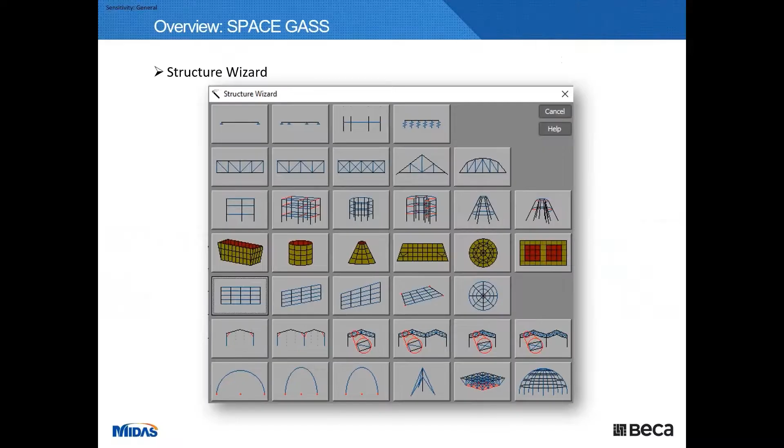There are some more useful things available in SPACE GASS, like we can perform linear static analysis, non-linear static analysis, buckling analysis, dynamic frequency analysis, spectral response analysis, and so on.

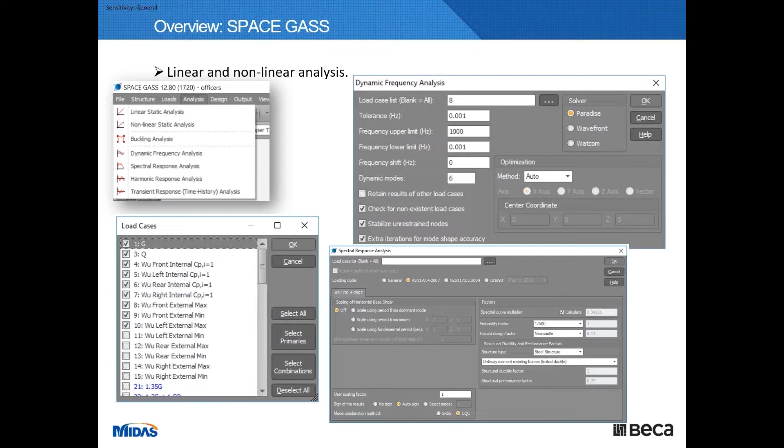Dynamic frequency load - we have load cases readily available for certain kinds of structures, as I discussed previously, since we have the wizard available in SPACE GASS.

We can perform wavefront analysis, which is buckling analysis for steel structures as well as other kinds of structures. It's another helpful feature you can check by using it.

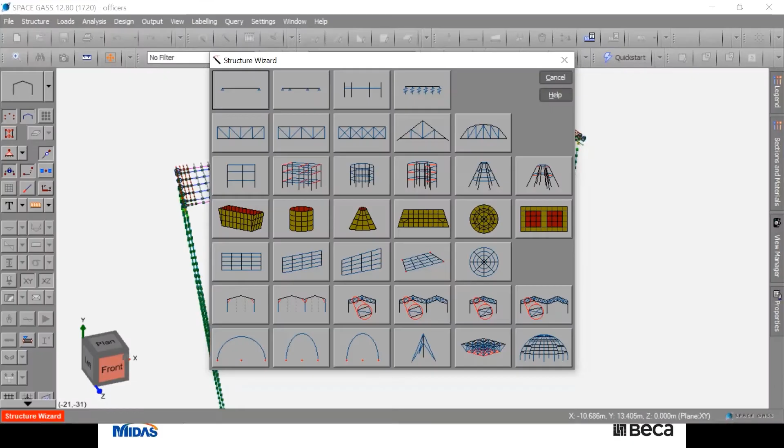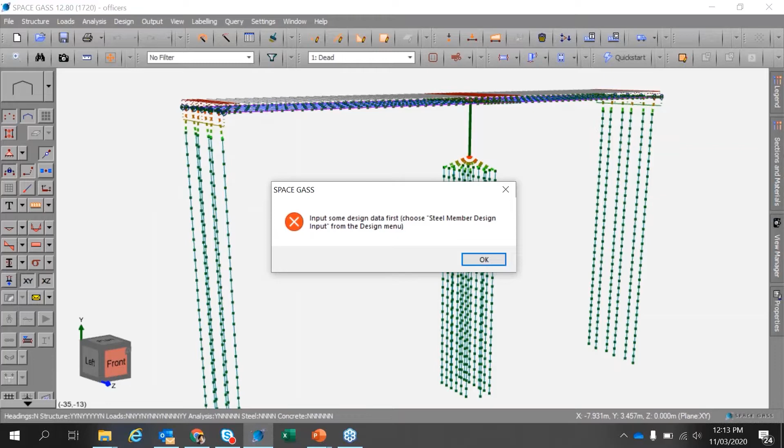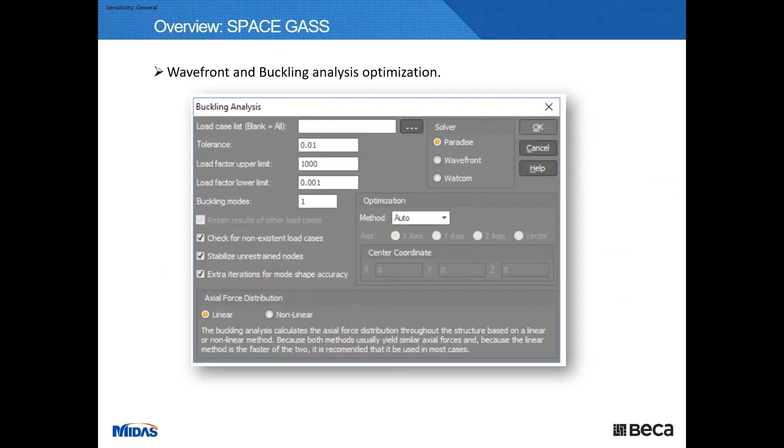We can manage filters by selection in SPACE GASS, which is a quite good supportive feature available in SPACE GASS.

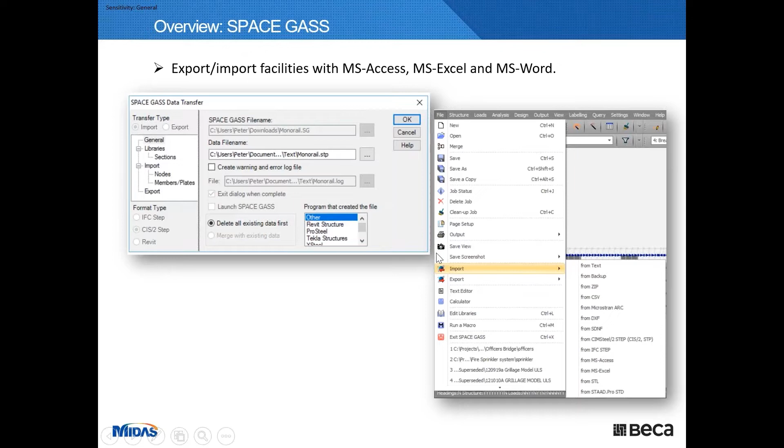We can also import and export Excel files, and other structures - you can easily import your CAD file as a structure, like a line beam model, from AutoCAD to SPACE GASS. You can even merge two structures by utilizing the merge facility of SPACE GASS, which is another good feature, and you can also run macros in SPACE GASS.

There are some extended features that are not included in the standard SPACE GASS software. You have to purchase them separately if you are performing plate element analysis, cable element analysis, or dynamic frequency analysis. These modules are not included in the standard form of the software, which is sometimes helpful if you are not interested in doing these analyses, so you don't spend more money on that. But sometimes you suddenly need to perform this kind of analysis, so you have to have it in your software. In MIDAS, we have each and everything available.

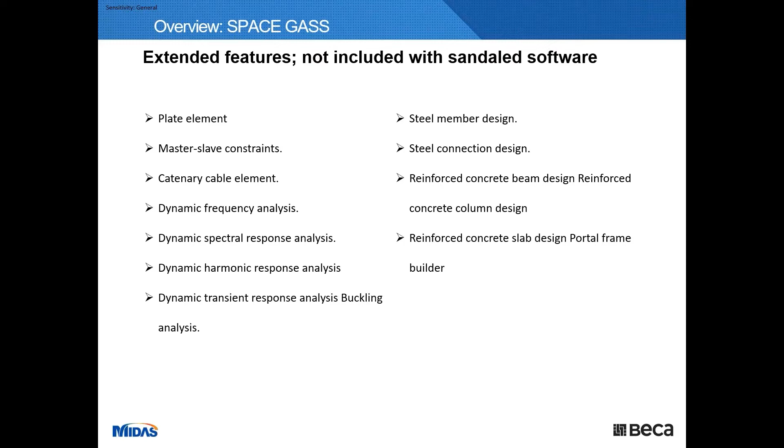If you talk about the limitations of SPACE GASS, yes, there are some. SPACE GASS is a multi-purpose structural analysis and design software for 2D and 3D structures, but there are some features that we cannot perform as quickly in SPACE GASS as we can in MIDAS. There is a list of these features that I have found while working in SPACE GASS.

When working in SPACE GASS, when you need to select or create a filter, like a number of elements, sometimes it gives us some errors. We will discuss all of these in a few coming slides. This is just a go-through slide. This is my first part, filter selection, so I'm starting from here onward.

If you are working in SPACE GASS, sometimes we receive this kind of error: too many selected members to fit in the filter list. I have created a video for that as well, which I can play for you. We have some errors when working in SPACE GASS, receiving errors during selection.

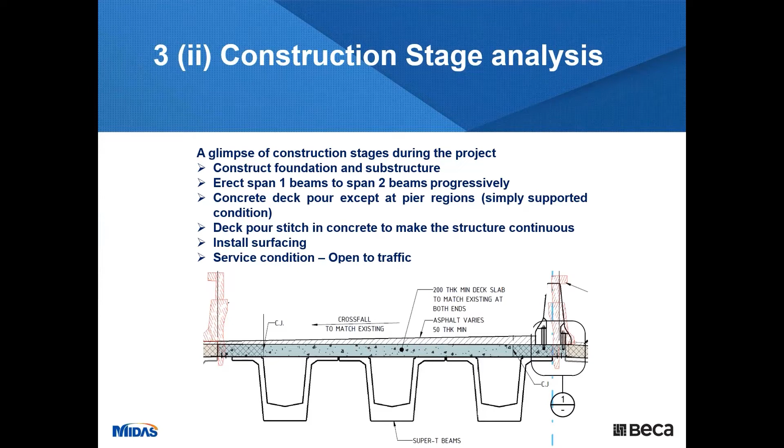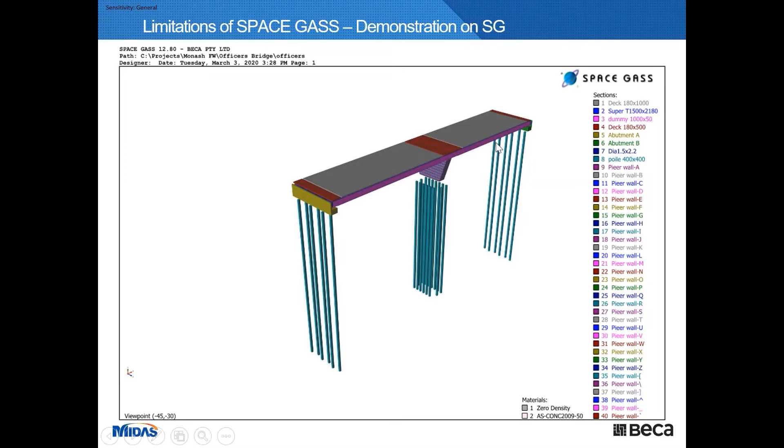When I was working in SPACE GASS, there were limitations to performing such operations, so I moved to MIDAS and performed all the analysis in one go. This is the bridge I'm talking about, a two-span continuous bridge. I tried to work on it in SPACE GASS as well, but I was unable to perform every task there. We cannot easily perform this stage analysis in SPACE GASS.

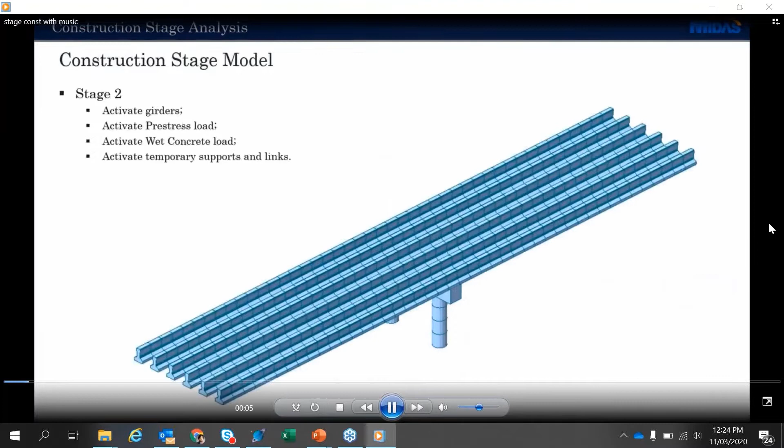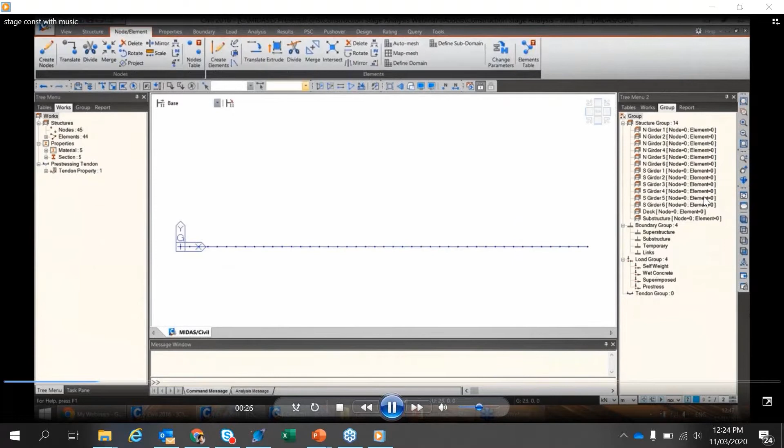I think you guys can see this video now. There is some... Can you guys see? Give me just a reply on this. Thank you very much.

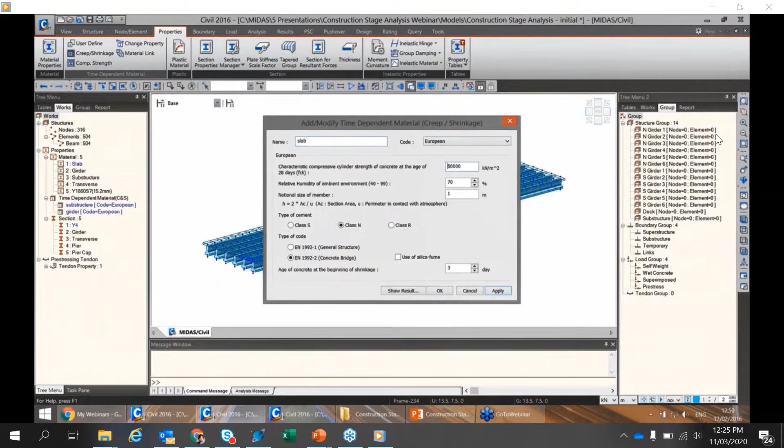This is the stage analysis while working on MIDAS. This feature is extended to MIDAS, so we can easily perform stage analysis while working on continuous bridges or when you have more than one stage involved in your construction.

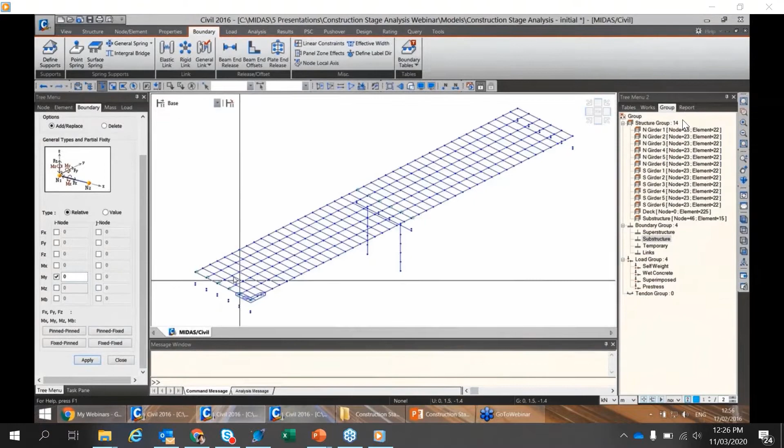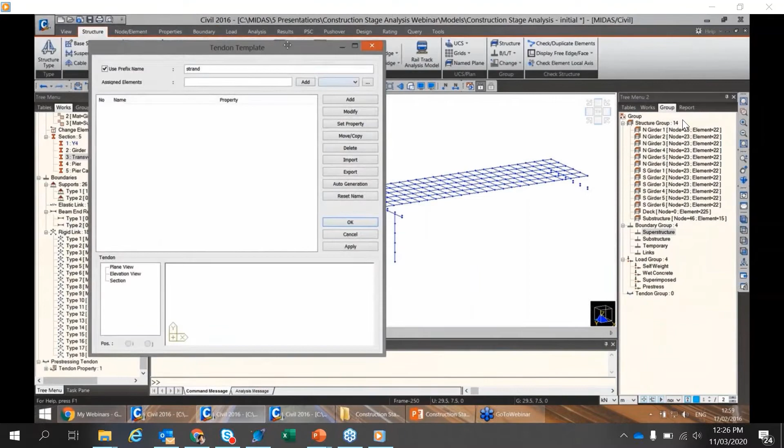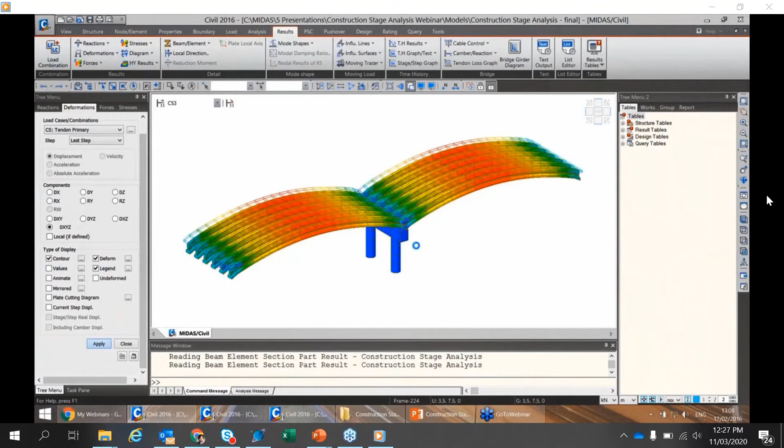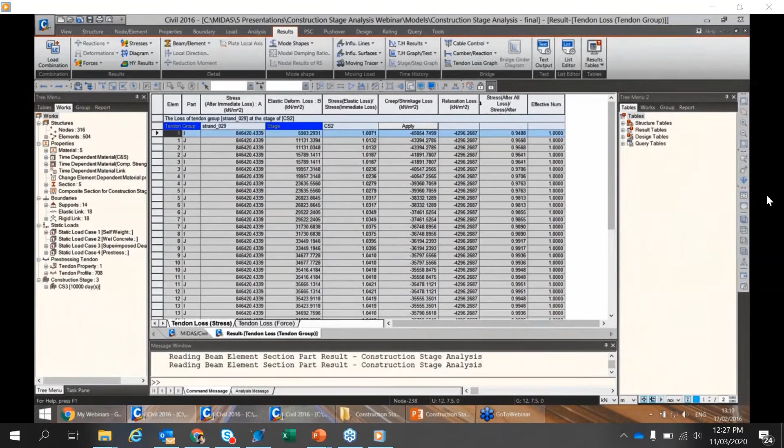Yeah, we have results as well. We are not interested in this staging right now, so we can move on from this modeling to our presentation.

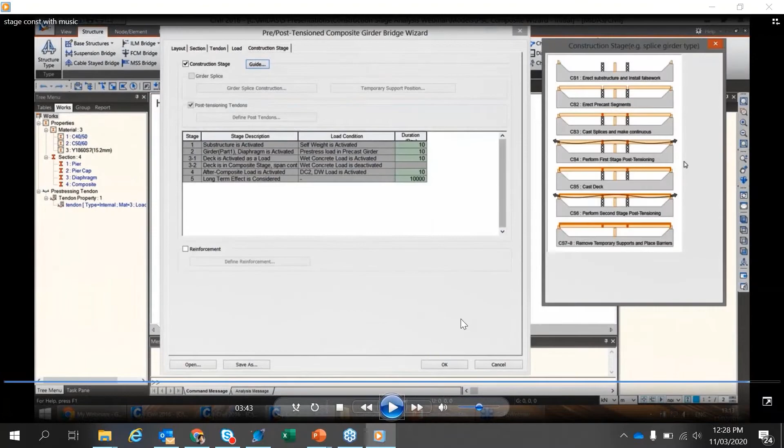Yeah, can you? I think you guys can see my presentation now.

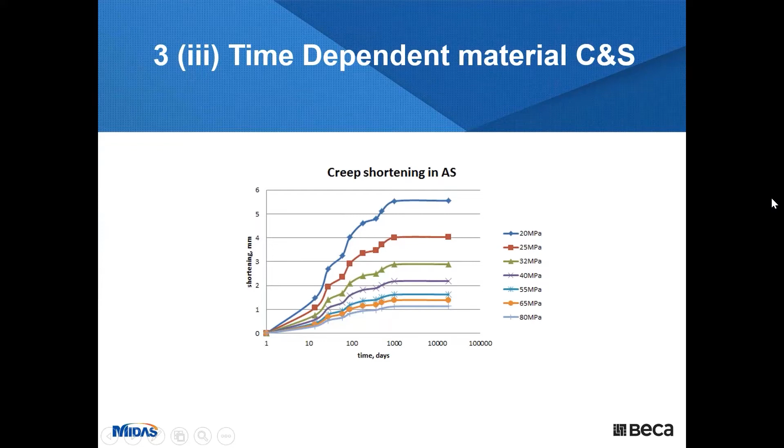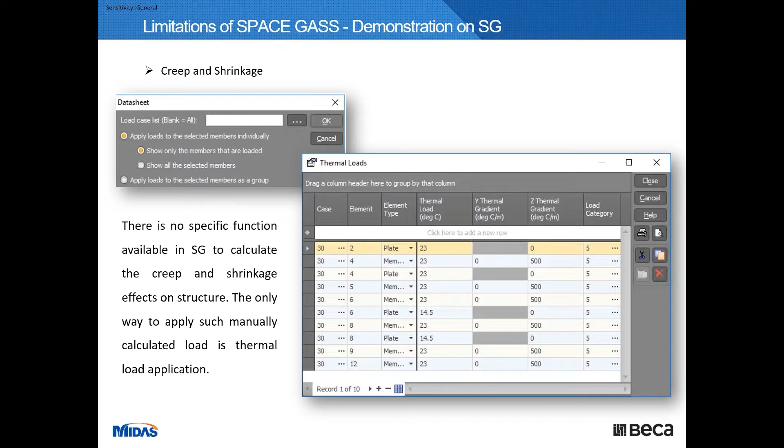Now we will discuss time-dependent material, creep and shrinkage. When working in SPACE GASS, we cannot apply creep and shrinkage as a material property. However, we can apply it as a thermal load for creep and shrinkage. But in the case of MIDAS, we can apply it as a material property. We can perform creep and shrinkage as good as possible in MIDAS because we can give our moisture contents and concreting time, and we can perform good creep and shrinkage analysis in MIDAS compared to SPACE GASS.

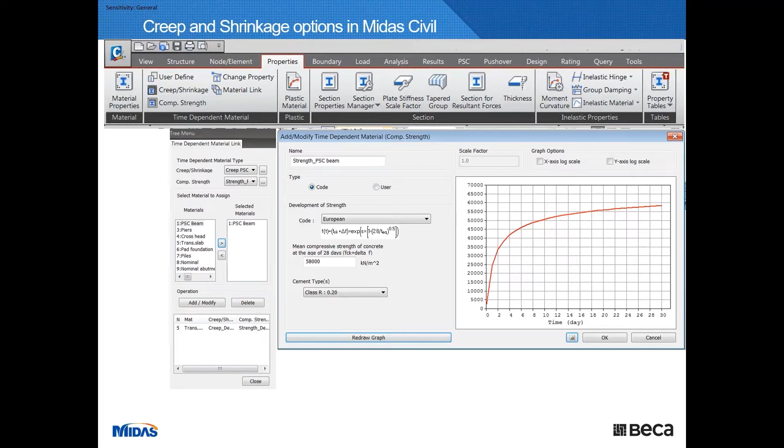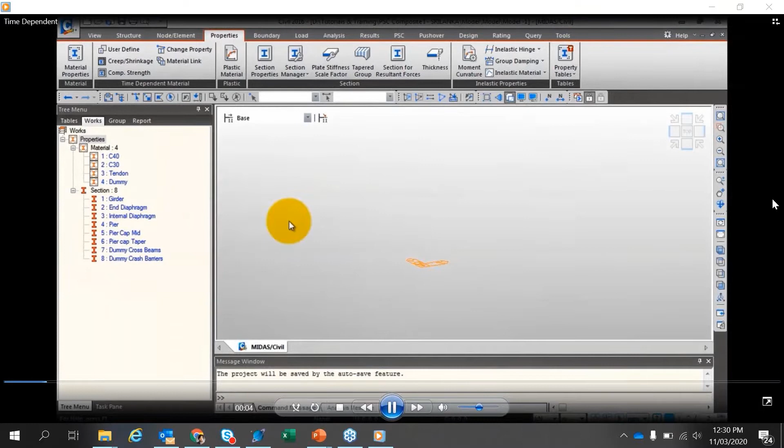I have another video for time-dependent properties. I think I can play it from here. Hope you guys can see this video. I hope you can see my video now. Thank you. Thank you very much.

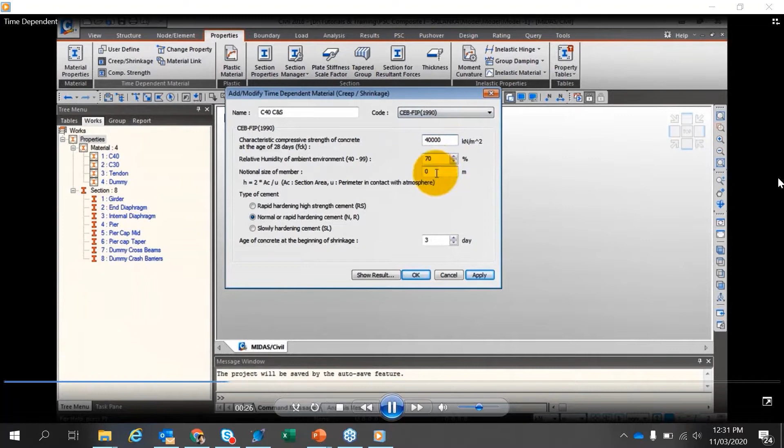These features are not available in SPACE GASS. We can easily perform creep and shrinkage analysis using MIDAS.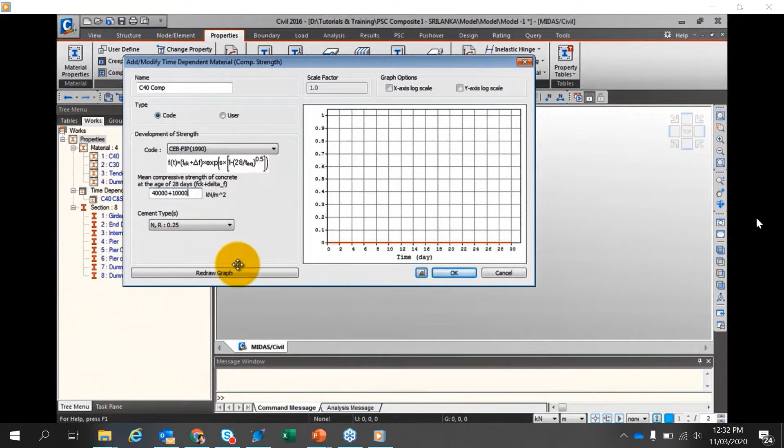It automatically creates the curve, the strength curve, for you.

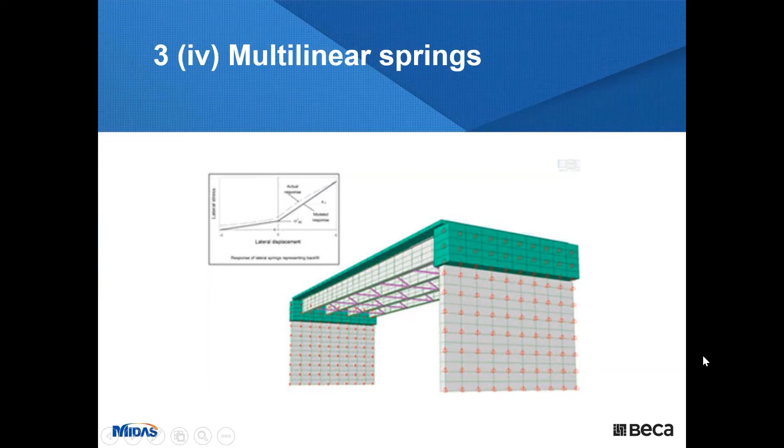So there is another constraint working in SpaceGass: a multi-linear spring. When you're working in SpaceGass, there is only one function available. We cannot perform P-Y; we cannot put values of a P-Y curve in SpaceGass. We have to give the stiffness values for the springs. There is no option available for having any other input from the user.

So this is the major constraint when we have a number of piles and we need to give input after each and every depth, like maybe every 500 millimeters. In that case, we need to spend a lot of time during modeling as compared to MIDAS, where we can easily perform the multilinear spring function.

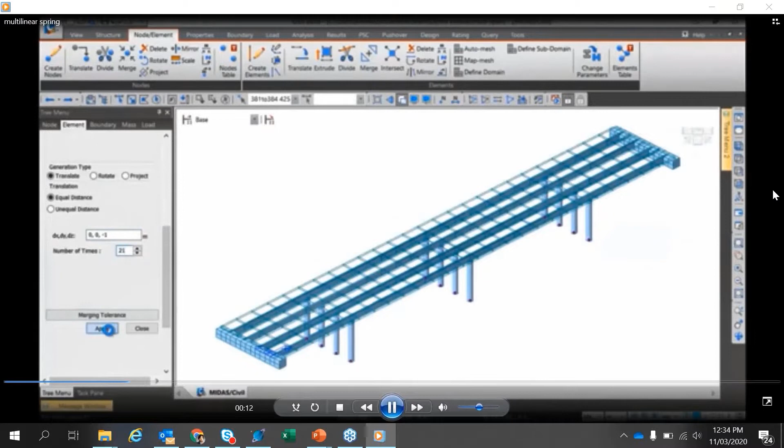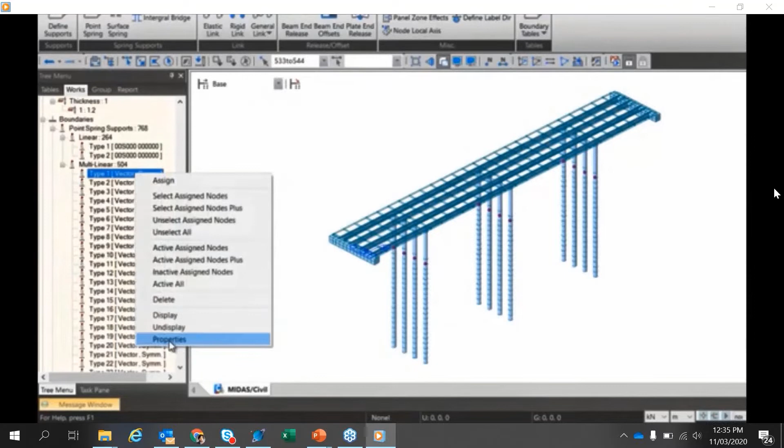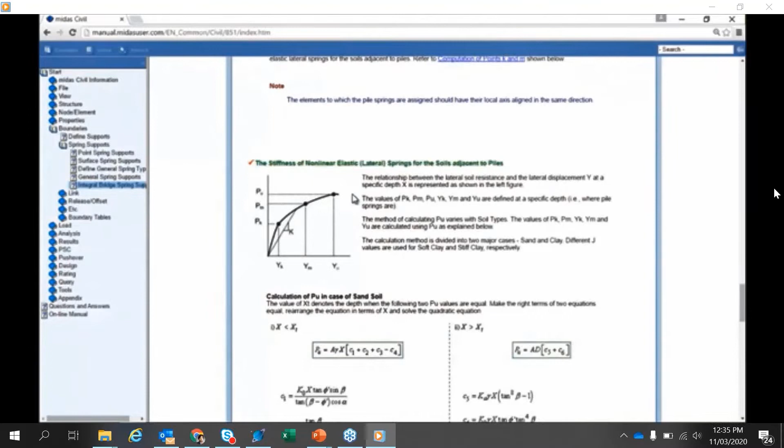By using MIDAS, we can easily perform this multilinear spring function, as you can see from this video. We are giving the P-Y values, and this we cannot perform in SpaceGass. We have to give only the stiffness of the spring. If we have a 30-meter deep pile, we have to give input maybe 60 times on each abutment, so we can multiply this time by the number of supports we have.

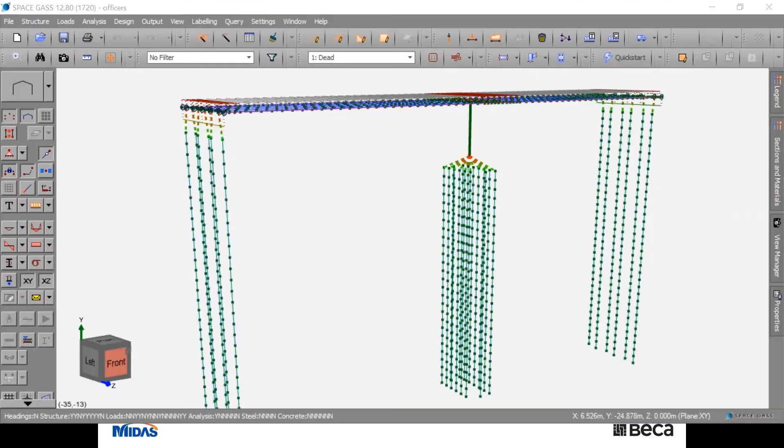Moving load analysis is available in SpaceGass, but still in very limited functionality. As compared to when we are working in SpaceGass, we can apply moving load. Let me demonstrate this here.

Initially we must divide the lanes, our width into the number of lanes, manually. Then you have to create your scenario. For each and every scenario you need to put your load, like in my case I first selected the vehicle from the menu, then I had to create a path for the moving load. I have already created one, but I can make another path as well. You must know which nodes you are using to make a path for the moving vehicle.

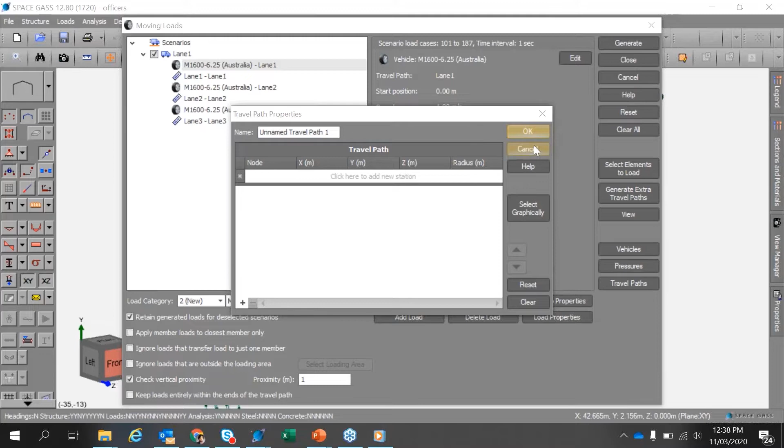You can also provide some radius if you have a circular or curved bridge. But it's still that if we have 3 lanes, we can only run 3 vehicles by creating certain load cases. I cannot make a combination of different lanes.

If I want to run lane 1 or lane 3 only, I need to make another load case for that. If I want to run my vehicle on 3 lanes consecutively, I need to make another scenario. So for each and every scenario, I spend maybe half an hour or more to make a scenario in SpaceGass.

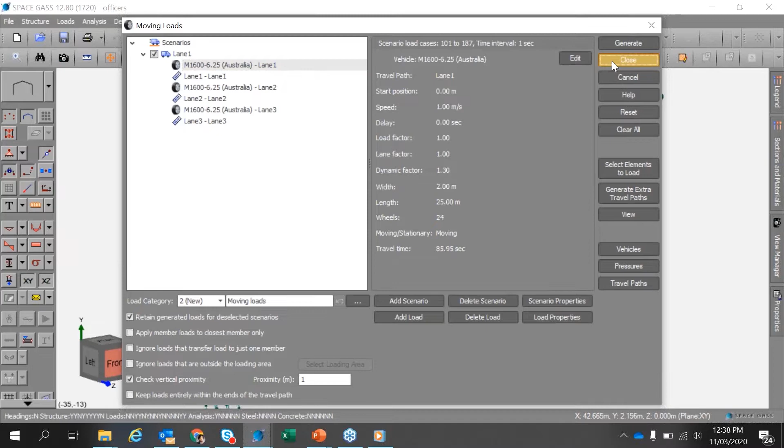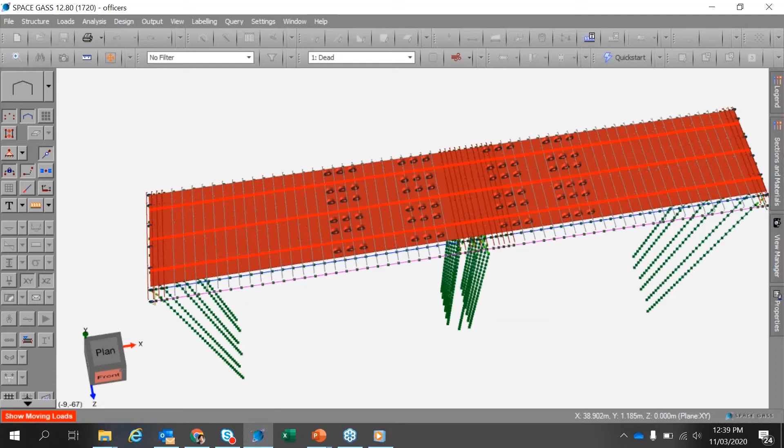But in case of using other software like SpaceGass, I can show you my vehicle right now moving on the travel path on my deck. These are 3 lanes, but if I want to move my vehicle in a different pattern, I need to create more scenarios, like more than 3 or 4.

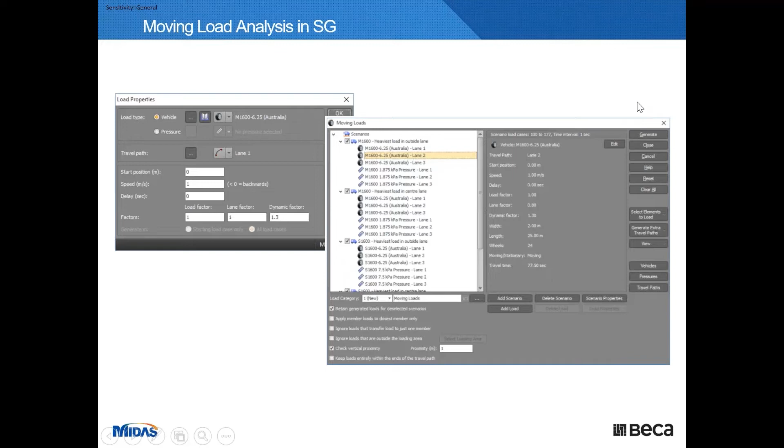But in case of MIDAS, we have a facility that automatically makes combinations, so it is more convenient for the user. As the video is not running, I performed this manually in front of you.

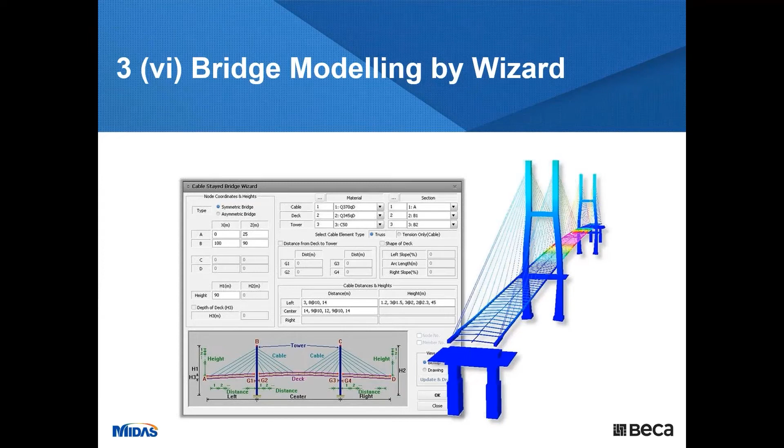Bridge modeling wizard is a mighty feature of MIDAS. We have this feature available in SpaceGass too, but you can see there are a number of predefined structures available that you can perform in MIDAS, like suspension bridges, cable-stayed bridges, ILM bridges, FCM bridges, MSS bridges. We cannot perform a number of these bridges using SpaceGass as well.

In case of SpaceGass, sorry, I mean MIDAS, we can perform a number of functions using the wizard modeler. But in SpaceGass, we have very limited function available in our bridge modeler—we can only create our grid lines, giving some constraints and section properties, not more than that. But here, when performing on midasCivil, after completion of this wizard, you have a complete bridge including substructure, pile, piers, headstocks, girders, deck, and pre-stressing.

Each and every part of the bridge you can perform while using the pre-stress function, like the wizard function of MIDAS.

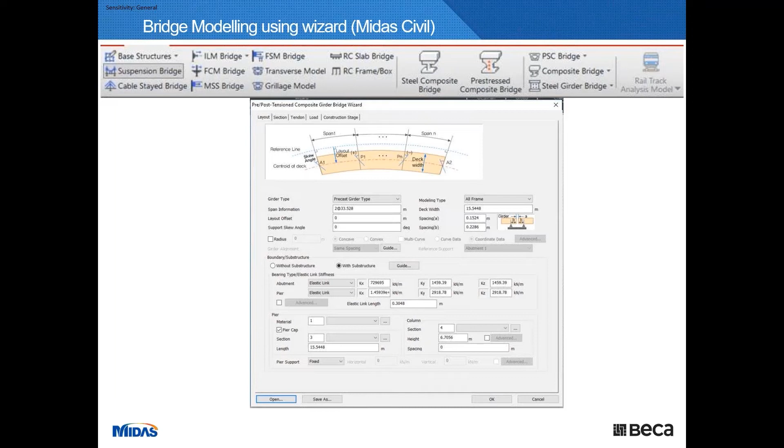In SpaceGass, when you are performing on wizard, you are actually creating your lines, including the section properties, not even pre-stress, no loading. Loading creation is a main task while you're working on any structure, maybe bridges or buildings, but we don't have any preset loading functions available in this wizard.

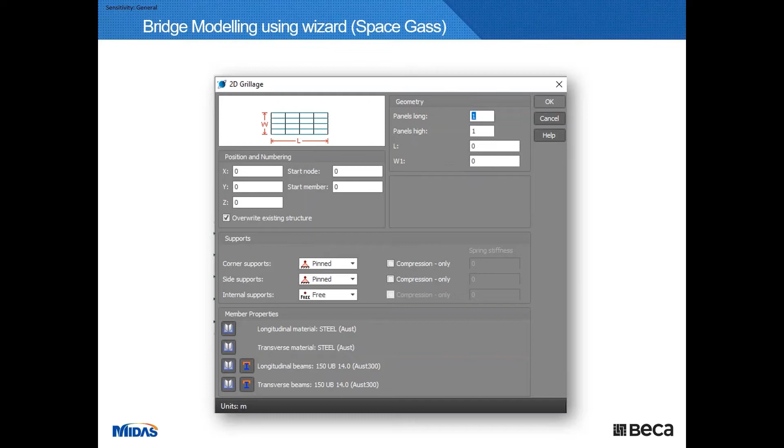So I think there is a lack here - I will not be biased, but there are some constraints when using SpaceGass, especially for bridge modeling and design. It is a good software, and like I've said before, you can perform a number of tasks using SpaceGass, but especially when talking about bridges, we are limited here.

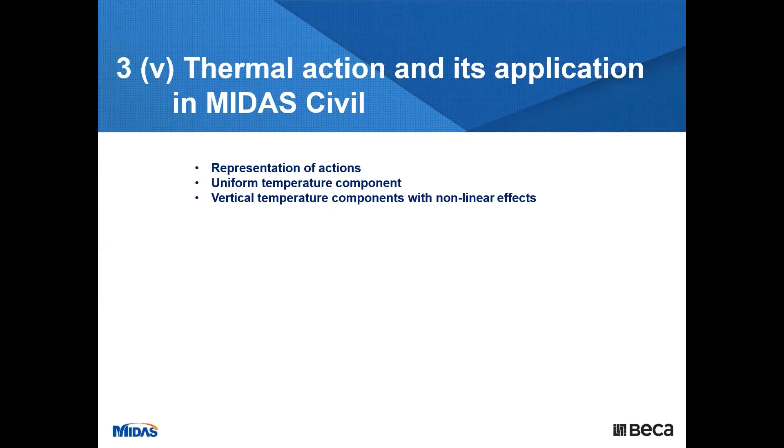Thermal action and its application in midas Civil. We have a similar function available in SpaceGass as well, but I want to draw your attention to some points. In my next slide I'll show the functions available for thermal loading in SpaceGass and the functions available for thermal loading in MIDAS as well.

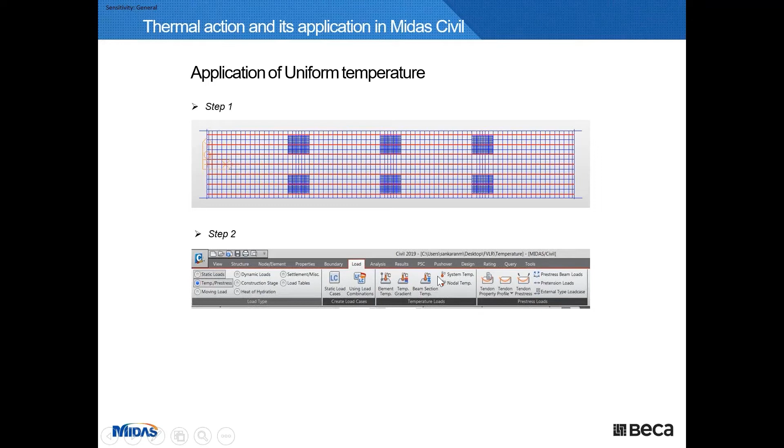These are some MIDAS snapshots. You can provide the curve in MIDAS for the thermal variation from the depth, from the top till bottom, but in SpaceGass you are unable to do this. We only have this function available in SpaceGass - input one thermal loading, which is a linear function, for the variation of depth.

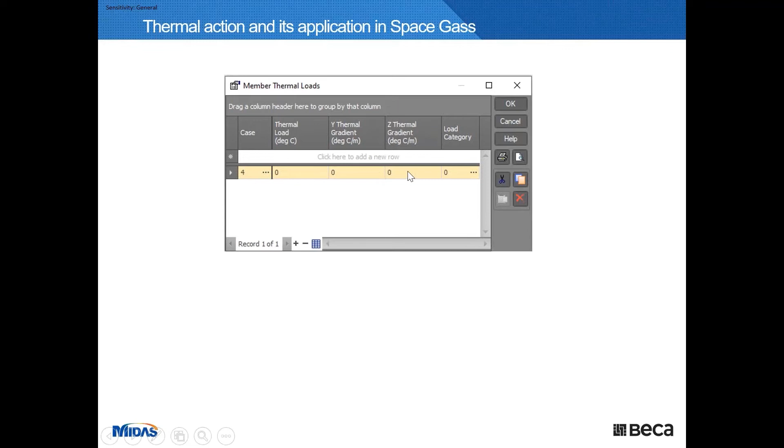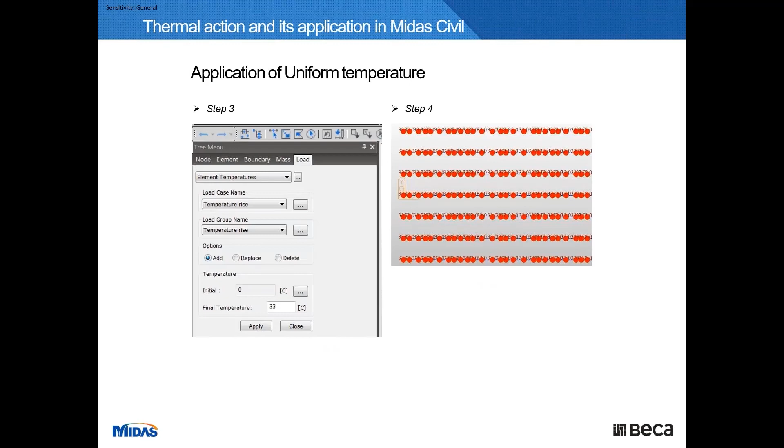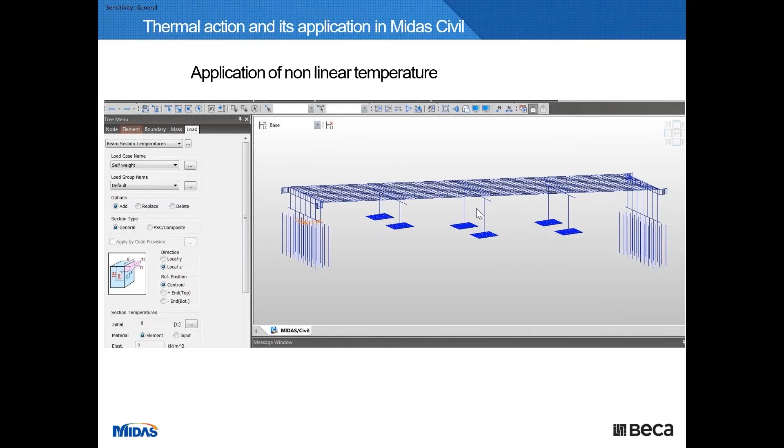When we are talking about MIDAS, we have a number of inputs available for linear or non-linear temperature variation, as well as uniform temperature. It's a good part of SpaceGass, but still it has some limitations.

Combination of load cases - you can use your MCT file, which is midas Civil text file load cases preset. If you create a single MCT file, you can utilize this file for a number of bridges. You just import that MCT file for your new bridge, and it will work so you don't need to put extra effort and time for each and every bridge or structure. So as I said, there is a limitation.

Use moving load envelope as a single load case to combine with other load cases in SpaceGass - you cannot use your moving load envelope to make another combination with the static case. You can use your static case along with your moving loads, but you cannot use the envelope with other static cases.

However, in MIDAS we can use the moving loads envelope as a static load to make a multiple load combination with other load cases. This is another good function of MIDAS - when working in SpaceGass, you have to put extra work and effort every time to create these load cases and combinations, but in MIDAS we have preset load cases available each time.

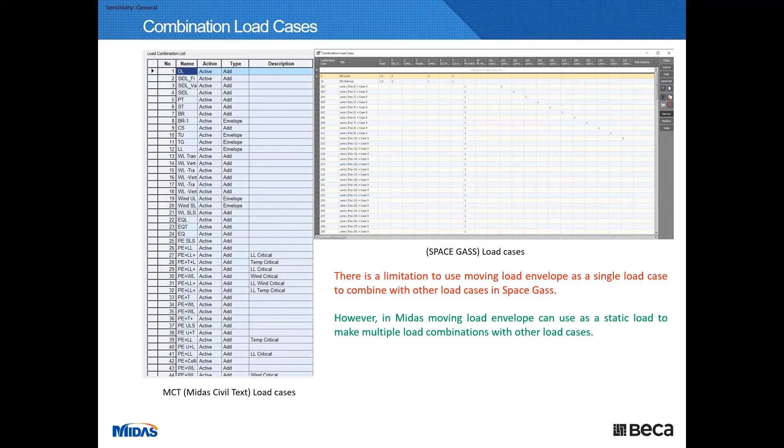Stressing in MIDAS versus SpaceGass. If we are working on pre-stressing, we have this input available for pre-stress loading.

However, working in MIDAS, we can provide the profile for the tendon, we can give the bonded and debonded length for the strands, we can provide the type of strand, we can provide the strength of the strand. Whatever input you have for the pre-stressing, you can put it in MIDAS.

But in the case of SpaceGass, we have pre-stress force. You can just provide the pre-stress force by calculating manually, and you can do each and everything in SpaceGass, but you have to perform your hand calculation or Excel spreadsheet working to get the outcome, then put that load there. Otherwise in MIDAS you just put your inputs, which are readily available from the drawings, and you're done - you don't need extra effort for calculating each and every strand value and their loads. I can show you on SpaceGass.

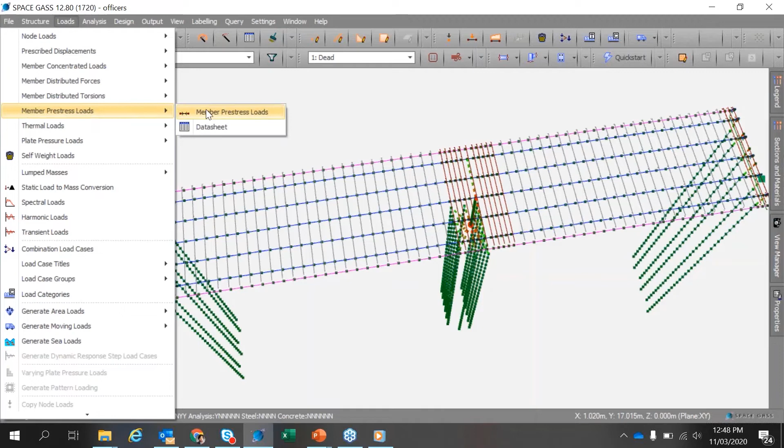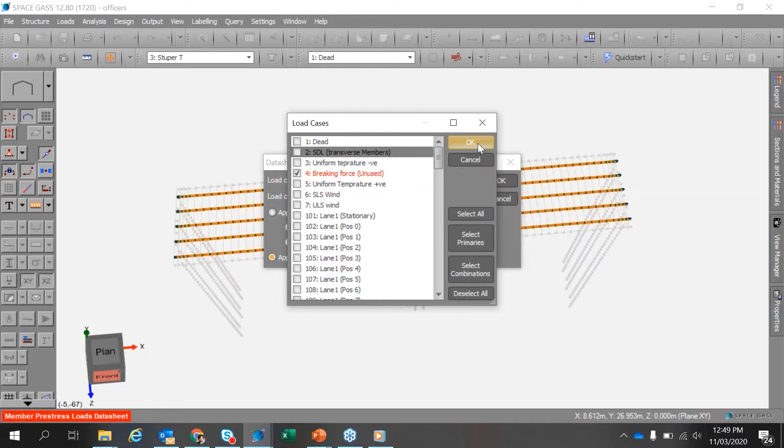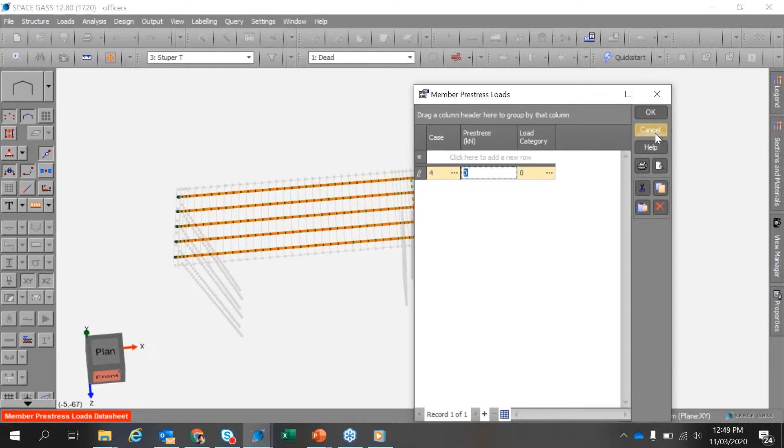Pre-stress load. Right now I'm using just a breaking force for pre-stressing. This is the input which is available in SpaceGass for pre-stressing - load category, so I'm not counting anything here, for the benefit of using MIDAS for performing the functions for your bridge versus using SpaceGass.

I think we have performed all each and every function which I can find from working in SpaceGass and MIDAS. But still, if there are some points which we haven't discussed yet, I can go through from my slide.

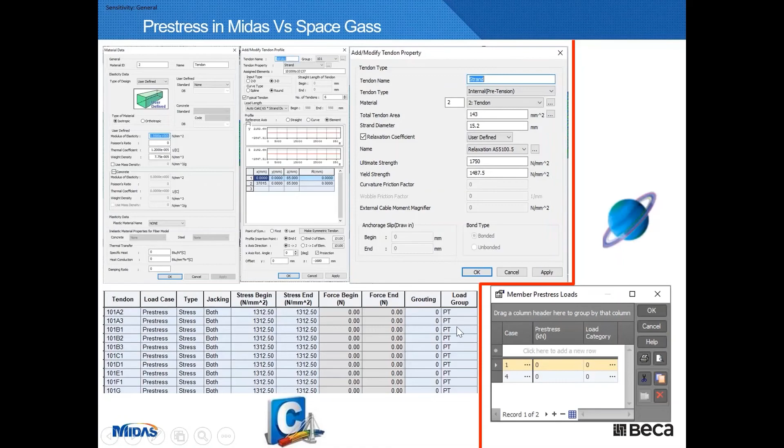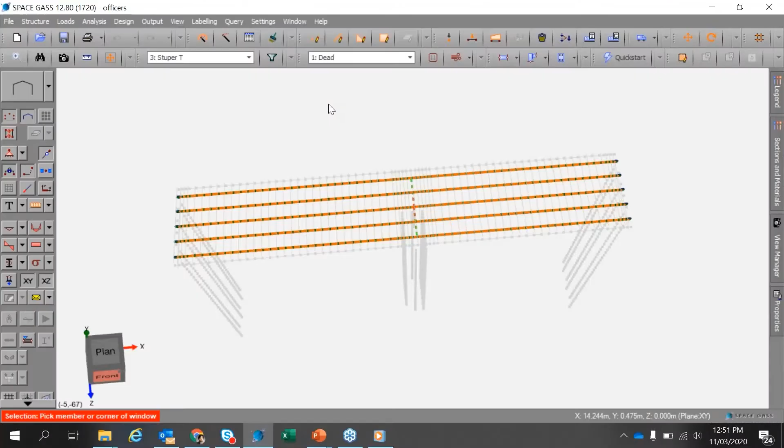It is another facility available in MIDAS that you can create your own sections, and you can easily import your CAD file as a section. And if you have a difficult section available which is not available in the library, because we have a limited library for sections available - see,

I cannot perform a composite action over here. I can just give the stiffness of my top slab, but I cannot give here the different material properties so that it will behave like a composite section.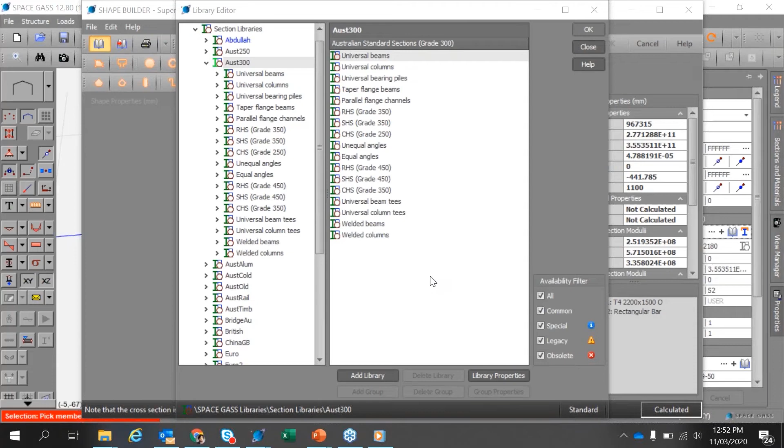We have this section library available in SpaceGass, but still if you are working on a different code which is not available in this library, and the section is quite difficult to prepare, in that case we can import the section directly in MIDAS from AutoCAD. But in SpaceGass, you cannot import your section - you can create your own using this function, but it is time consuming. You can perform each and every function in SpaceGass, but it is time consuming, you have to put extra time and effort. But in case of MIDAS, you can just perform it easily, like 1, 2, 3.

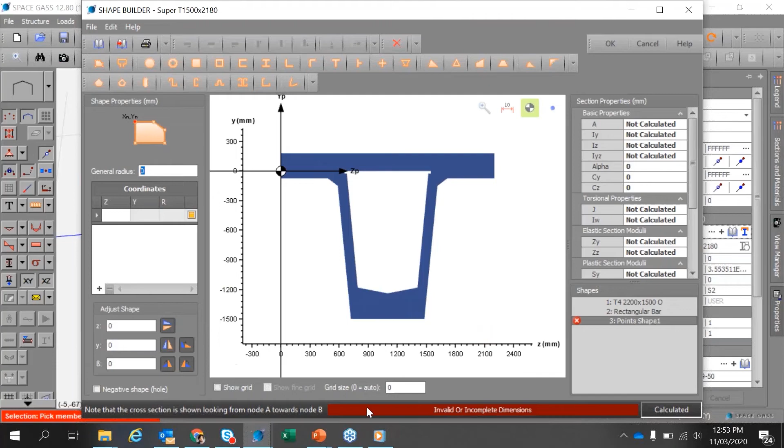We don't have compression-only springs in SpaceGass, which is also available in MIDAS. In multiple cases we need to have a compression-only spring, but there is a constraint in SpaceGass that we cannot apply these springs.

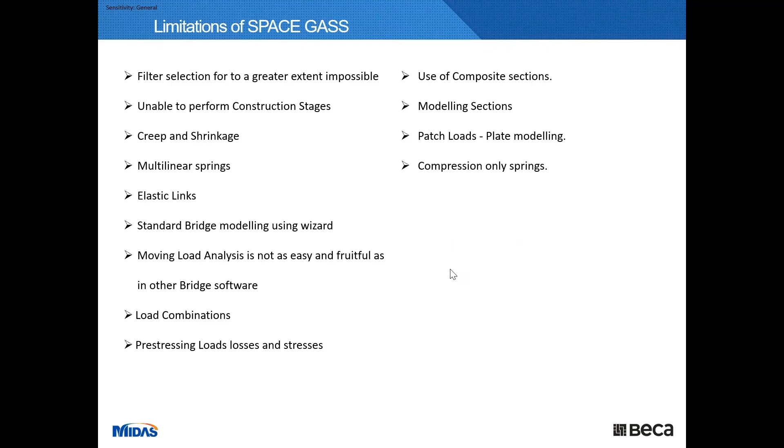So in conclusion, I will just take some questions from the audience.

Yes, we definitely have a huge difference in cost of both softwares, but like I've said, if you are working for bridges - right now in the industry we have a lot of work, maybe each and every consultant is surviving just because of these mighty projects running in the industry - and in this crashing resources time, we cannot put extra hours to make our project unprofitable. So maybe it is a one-time cost for using the other software, but it will definitely give you positive results eventually. So I think I've answered your question.